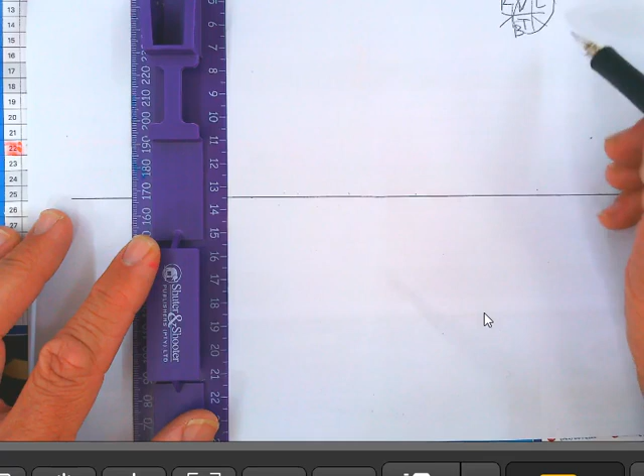So we're going to be having on our page two lines like this. Because it's a left view, we're going to have front, left, and the top view there with a 45-degree line. OK, ek gaan julle gou wys hoe ons daai gaan doen.

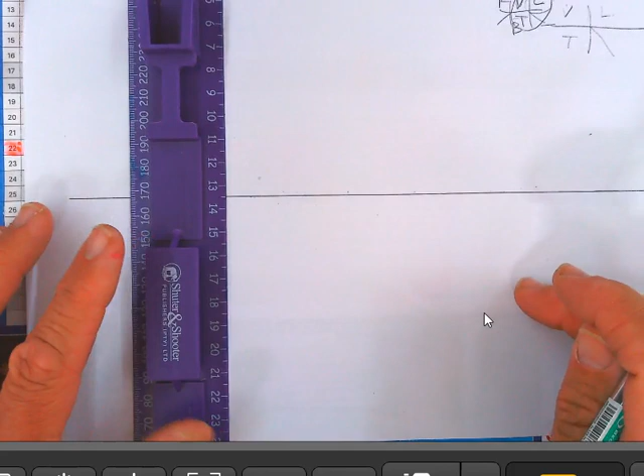Nou, belangrik, I want you to take the triangle that you have and to put it on a ruler. If you don't have this, you can borrow from a friend once they have done this. Put the triangle on the ruler so that it can slide like this, and make sure that it's exactly on your line.

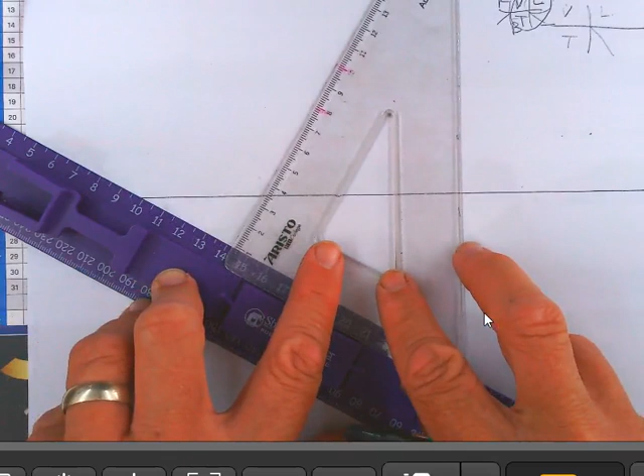Maak seker hy's op die lyn daar, nê. Nou swaai jy net jou driehoek soos dit, you just swivel it, and I'm going to move it this way. You guys have a smaller triangle so you can move it higher up if you want to, or more to the side, that's okay. I'm going to draw a vertical line here.

And if you don't have this but you have a protractor, 'n protractor is 'n gradeboog. Nee, hier's nog een driehoekie wat ek vir iemand kan leen. Daar's hy. Goed, so you can measure this out as a 90-degree corner as well.

If you have got a compass, a passertjie, you can do the following. I'm going to show you quickly how to get the half of this thing. If you don't have a compass, you can use a protractor, I'll show that as well.

You can make a little mark there, and just make sure that the compass doesn't move. As daai beentjies los is, gaan dit nie werk nie, dan moet jy hom vasdraai.

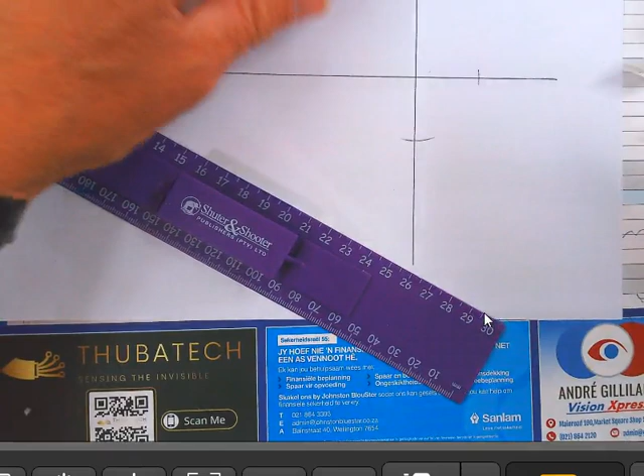Then what you can do, I'm just going to move this up for clarity, then you can put your compass on the same distance and you can just put it on that corner. Draw an arc, trek 'n boogie, sit hom op daai merkie, trek weer 'n boogie, en as jy dit gedoen het, nou het jy daai hoek verdeel in die helfte. En wat is die helfte van 90?

45. So that will give us a 45-degree angle. Listen, this must always be 45.

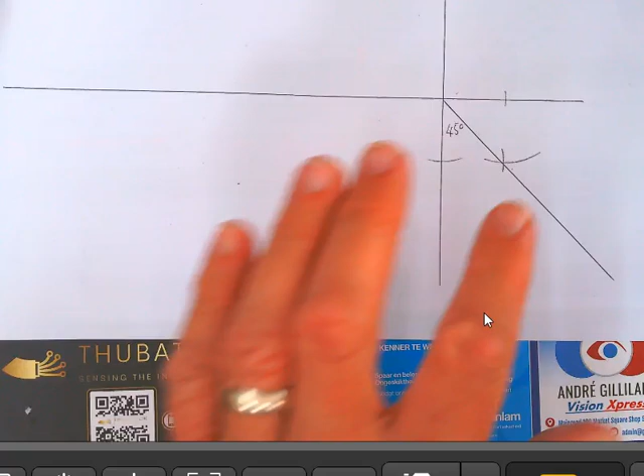So your 45 degree triangle, you will also see this is this triangle. So if you guys are on this vertical line, you should also see this is exactly 45 degrees. Okay, so you can use this triangle as well.

The other way that you can do it is measure the same distance to the side, measure the same distance down. The bigger you make it, the more accurate it's going to be. You can, for instance, measure 10, 20, 30, 40 millimeters or 4 centimeters, just an example.

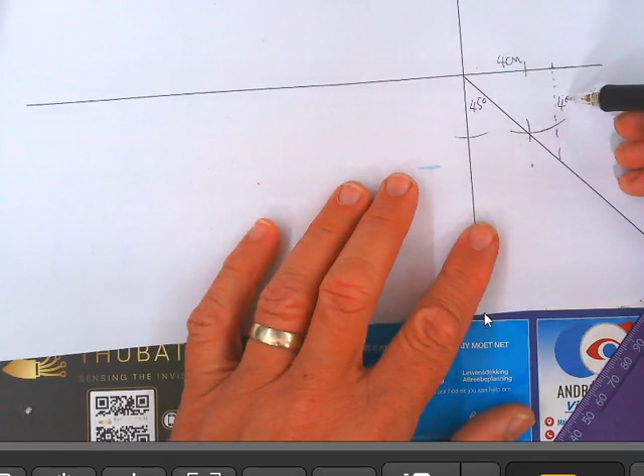And then I can measure straight down 1, 2, 3, and 4 centimeters down, so like half of a square. So 4 centimeters to the side, 4 to the side, 4 down. You can make it 6 to the side, 6 down, and that will give you the 45 degree angle.

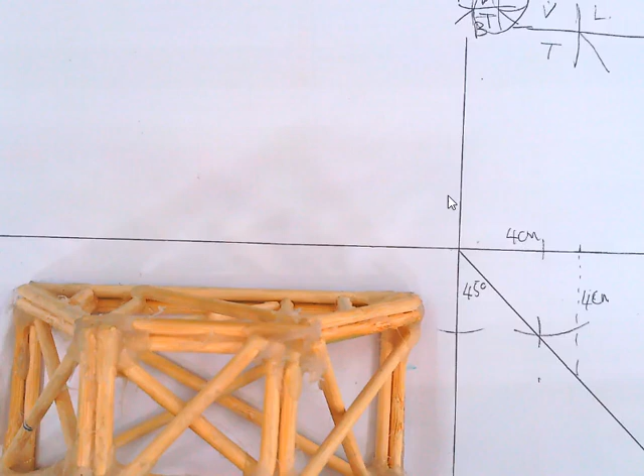So what are we going to do now? I'm going to show you quickly what we're going to be doing. So now we're going to be drawing the front view of the bridge, and the top view of the bridge. I'm going to make this bigger for you. The top view of the bridge. Okay, we can keep a centimeter there.

Can you guys remember what we spoke about the last time? If you leave a space open here, what's going to happen there? You're going to have the same space. Why? Can you guys remember this whole story?

You don't have to fold it. I'm just going to show you, because sometimes you guys forget very quickly.

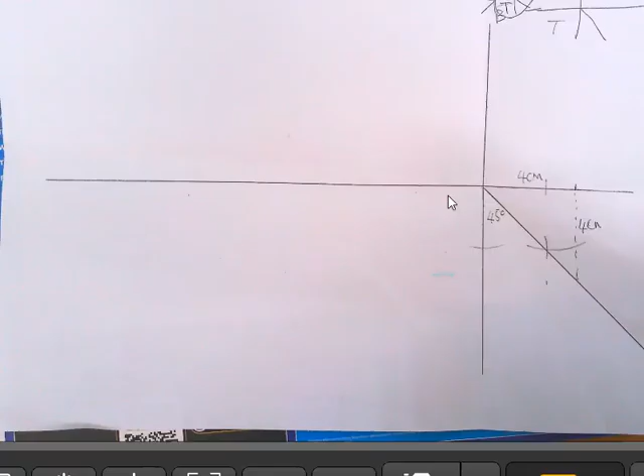What are these measurements? My bridge, the specifications you will receive later, but my bridge is going to be 120 millimeters long. What is 120? It is 12 centimeters. My bridge will be in total, it's supposed to be 50 wide.

So this one is 50 at the top. This one was a little bit more at the bottom, 70. It should fit in 50 by 50. The height in this case was out.

The height was supposed to be 50 as well. I think this thing is more like 70, 60. Okay, so this is not according to specifications.

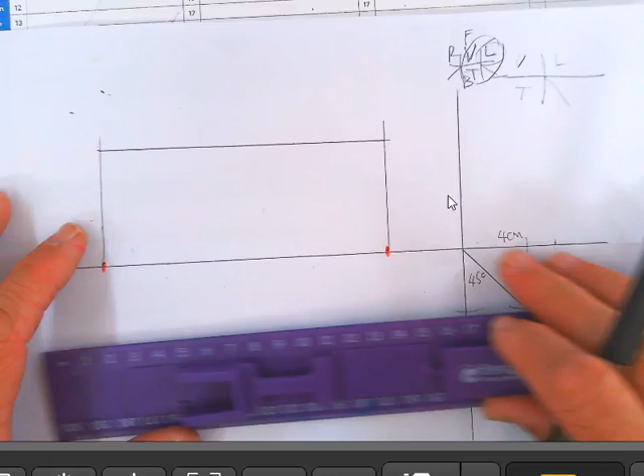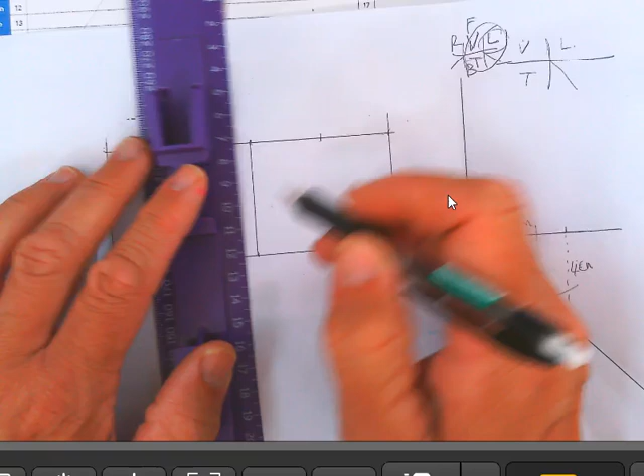Okay, and now I want you to quickly divide this up into 3 centimeter blocks - 3, 6, 9, 12. Do the same on the top: 3, 6, 9 and 12. Alright, and then quickly draw that little box for me.

Light lines, faint lines, not too dark. Draw that quickly for me, and once you've done that, draw the same box on the bottom, so you're going to project downward, bring that line down, bring this line down, bring all these lines down, make sure it's not skew. How do I make sure it's not skew? You can go and put your triangle on that line, and then just move it over - there, and there, and there, that one, and this one.

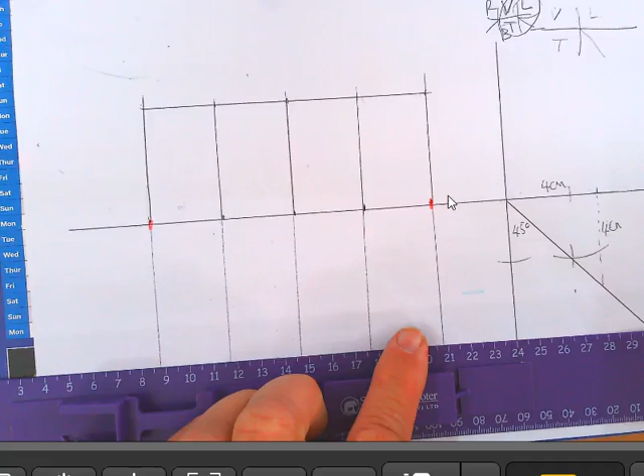I can see one or two of these lines are skewed, like this one. Why? Because I didn't run through that point there. Okay, so this line needs to be raised. Fix it.

Draw this together with me now. And then I want you to leave a centimeter open here. I want you to leave 1 centimeter in the top view. The only reason for that is so your views are not on top of one another, so your views don't lie over each other. So there is my top view.

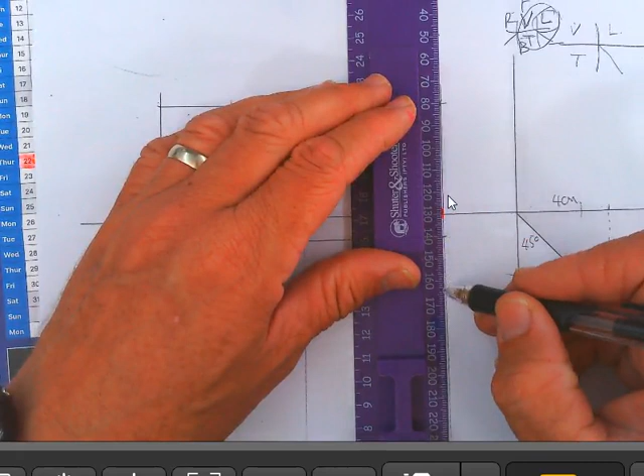There we go, I'm going to make a 5 centimeter gap here: 1, 2, 3, 4 and 5. Why? Because my bridge must be 120 by 50 by 50. 1, 2, 3, 4, 5 centimeters here. I want you to draw another box over here.

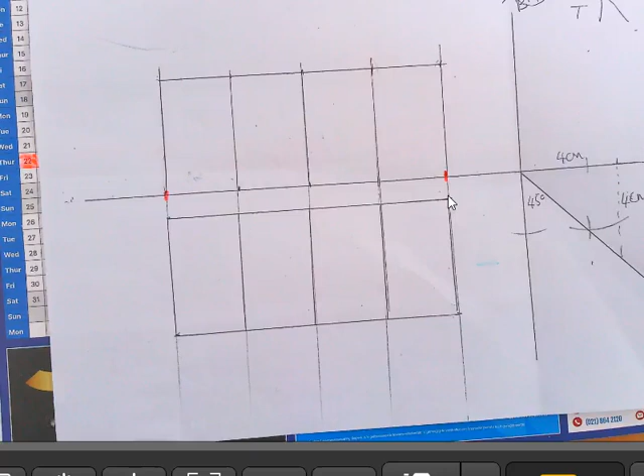Now let's say your idea looked like this. No, now here are terribly many lines, there's a lot of lines here. But let's have a look - we had green lines here in the front, and then we had crosses like that.

So this is my front view. Okay, so what I'm going to do is have a block with crosses there. Let's do that quickly. This is my front view. So you're going to have a line there, you're going to have a line here.

Do you know why this is important? Because these drawings, what are you going to use them for? To build your little bridge, right? You're going to measure off, put your stick down there, mark it off, and then cut it to length. This is why this drawing is so important, okay? And that is why it's called a scale drawing.

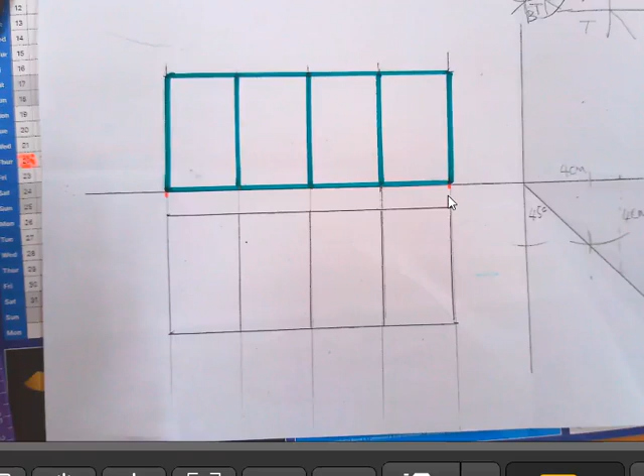So I'm going to draw this in for you there, draw that one in, draw that one in, and then we had those crosses. We had the crosses on there, which were black lines - let me just quickly check where my black pen is. I don't know where that is now, so I'm just going to use a blue pen since I don't have the black one here. So there it goes from corner to corner.

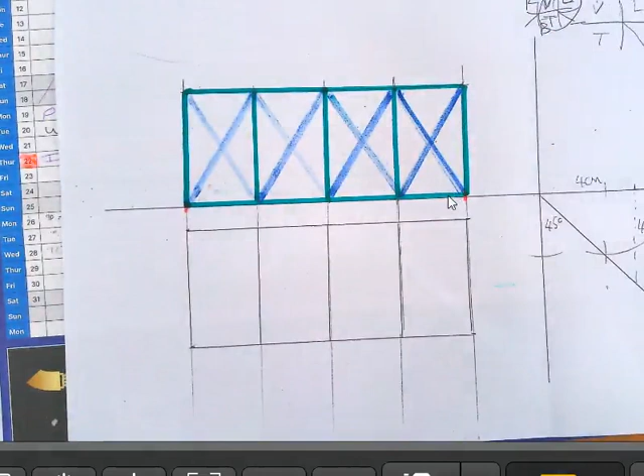Okay, now here's a very important thing to note here, a very important note to take note of, on a practical side. If we are going to zoom in on that corner there, what are we going to see? We're going to see the following.

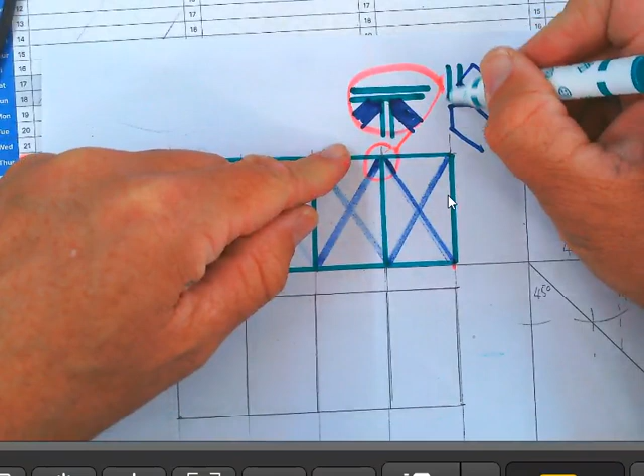Ja, daar gaan gaps wees, want jy gaan nou dit hê en dit hê. Nou is daar 'n gap daar, so dit beteken jy het eintlik nie 'n stewige joint daar nie. Hoor julle wat ek sê? So daar gaan jy baie mooi moet werk.

En dis hoekom ons hierdie ding, so wat sou my raad wees? My raad sou wees, maak jou frame, knip jou stokkies, daai en daai, knip dan jou ander stokkies wat tussenin lê. Nou onthou julle ek het gesê, die goed gaan op mekaar rus. So jy sny daai, kry een nou in die groep wat 4 stokkies vir jou klaar sny, hy doen daai op sy eie. Dan weet jy, hulle is dieselfde lengte. Dan kry jy 'n ander chommy wat hierdie stukke tussenin doen. En hulle moet presies almal dieselfde lengte wees, nê?

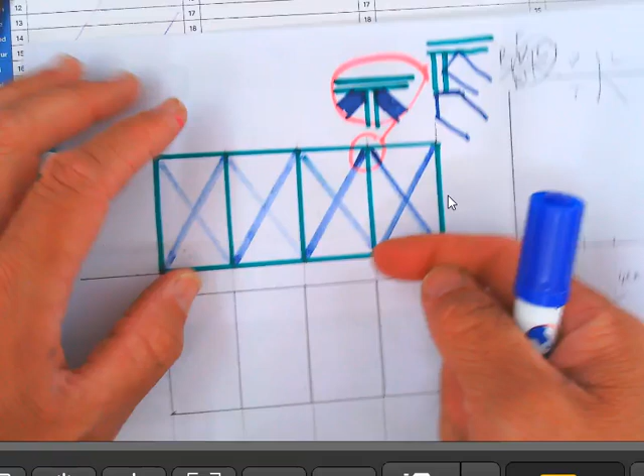OK, as ek dan dit klaar gedoen het, dan vat ek my ander stokkies tussenin en ek meet hom af, ek knip hom met my side cutter dat ek daai lekker hoekie het soos wat hy daar lyk en dan meet ek hom af en dan sny ek hom op sy lengte, nê? So dit gaan vir julle die beste werk om seker te maak dat jy 'n baie akkurate bruggie het, nê? En dat hy baie sterk is.

Dan moenie gaps wees tussen daai hoekie en daar nie, onnodige gaps nie, nê? Jy kan nie 'n ding glue wat hier stop en nou sit jy baie gom daar nie, want hy gaan flex. Hy gaan beweeg en dan gaan jou brug kollaps.

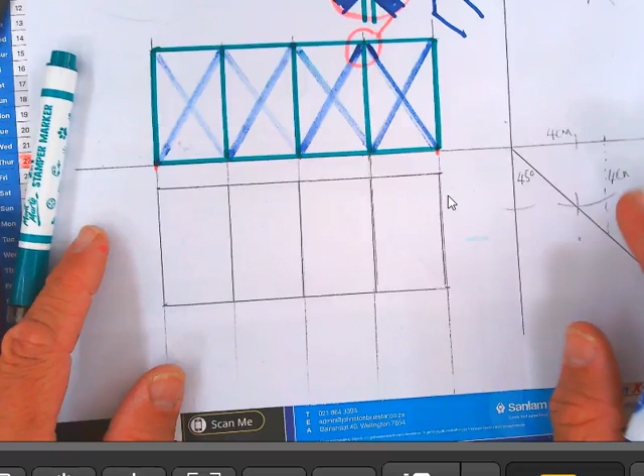OK. So teken gou vir my die vooraansig soos jy hom design het, gaan doen vir my jou bo-aansig, jou top view. Now in my case my top view looked the same, it had pink triangles there, so ek sal dit gou insit.

So this is my top view. And this is for the grade 9 technology PAT 2026, to make sure

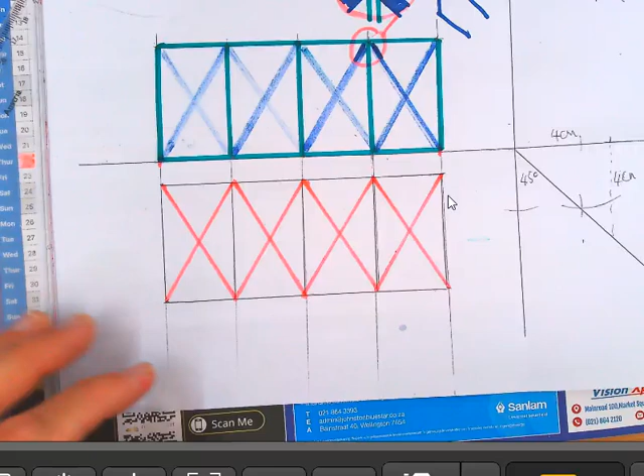that you know how to do this. Hierdie gaan ook groen wees. This will also be green in color because I'm having the top part of this bridge. Okay? Your design doesn't have to look like mine. I'm just showing this as an example.

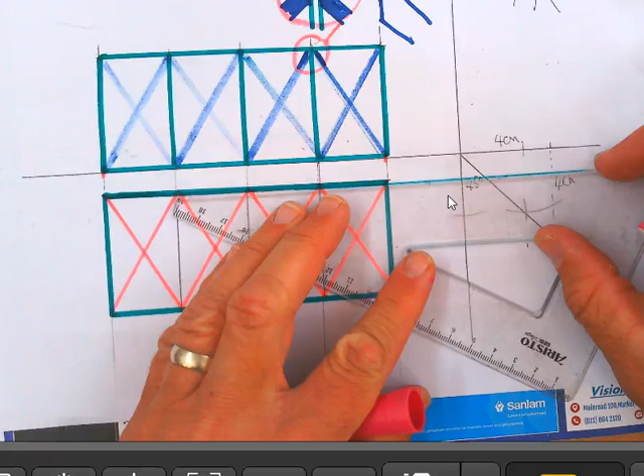Okay? Your design could be different. Nou hier kom die belangrikste deel van die tekening, nê? I would say the most important part. Why? Because you are now going to project over to your left view. So I'm going to take my ruler and I'm going to draw a line straight across to that point there. I'm going to draw a line straight across to this point here. I want you to do this with me.

And now I'm going to go straight up, 90 degrees up. How do I do that? I take my ruler, put it down, put my triangle on top of it. Okay?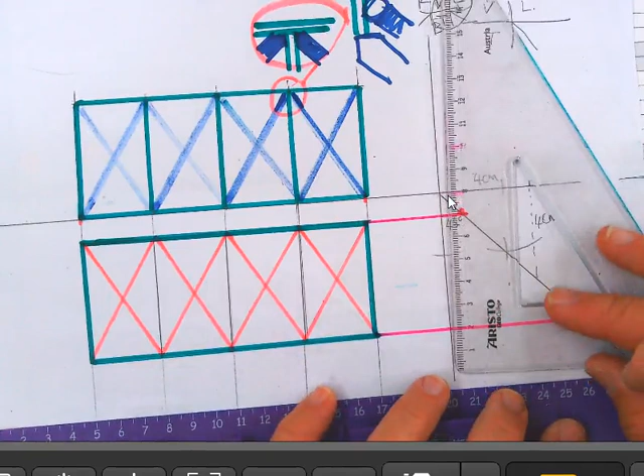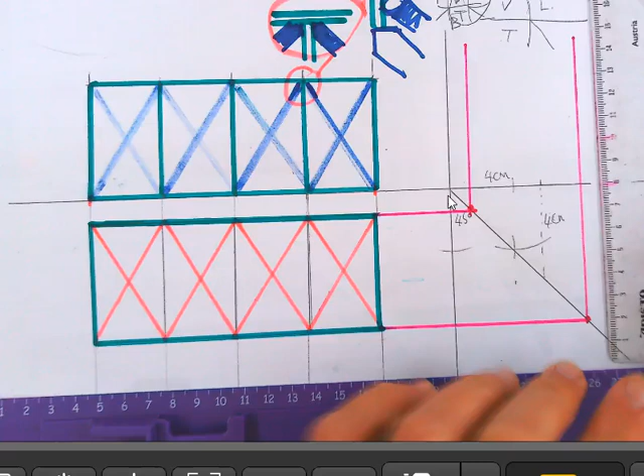And if you've got a smaller triangle, that's okay. Then just move it up a little bit. And make sure it's 90 degrees. Take this line up, construction line. Use your triangle and your ruler together to ensure accuracy. Right, project this line up. Once you've got this, you're going to project over from this side.

Okay, this will give you the outline of your left view. So this should be 50, rather, 50 by 50. Exactly like we spoke about the previous time. If you fold this, see what you get. Have a look there. You can see that it is correct. This is what you're going to get.

The left view of your bridge. Okay, so now let's quickly talk about this part. Now you have to think about this design. That's why we did the sketch like this before. So what I'm going to do is I'm going to adapt quickly. What I'm going to do is I'm going to try something new.

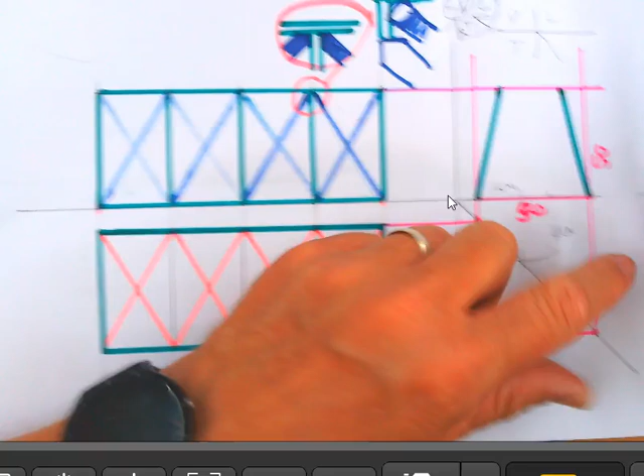I'm going to put in a strengthening part over here. 1 centimeter in, 1 centimeter from this side. I'm going to draw it into the corner there. Okay, and then I will also go and put, just for myself, I'm going to put a centimeter down. I'm going to put a line or a skewer stick over like that. I'm going to put 1 centimeter down there. I'm going to put a skewer stick over like that.

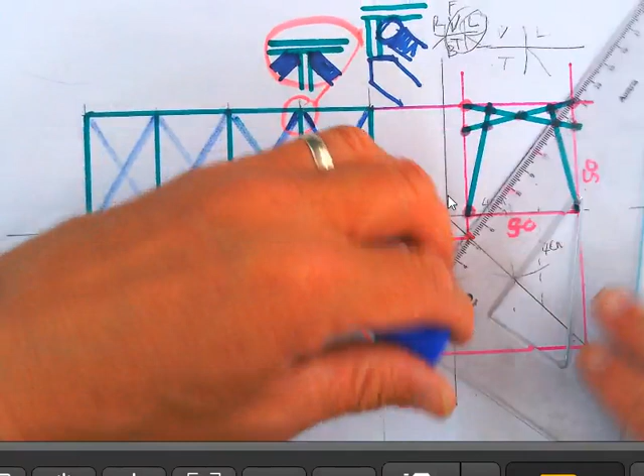Where will I glue it? Let me show you where I will glue it. I will glue it there, there, there, on that point, in the center, on those 2 points, there and there. I will put it on the inside there. This should give you quite a strong design. You still have a lot of open space. You can even go further if you want to and add another part in here. You don't have to, but you could.

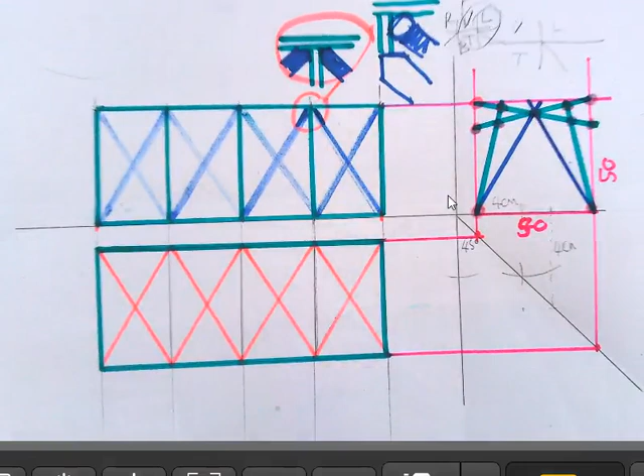Even to the top there if you wanted to. Do you have to do it this way? No, you don't have to. This is just my design.

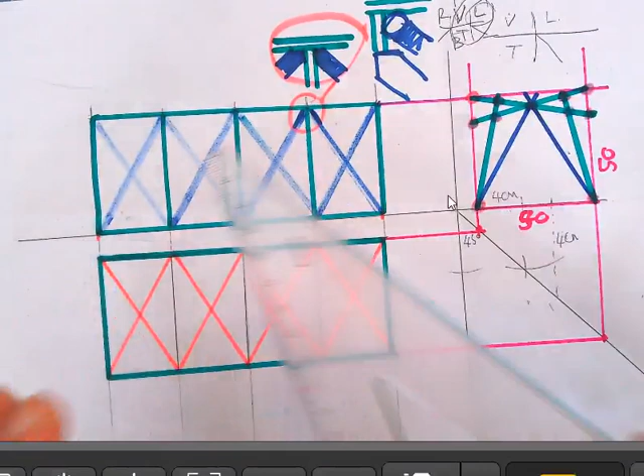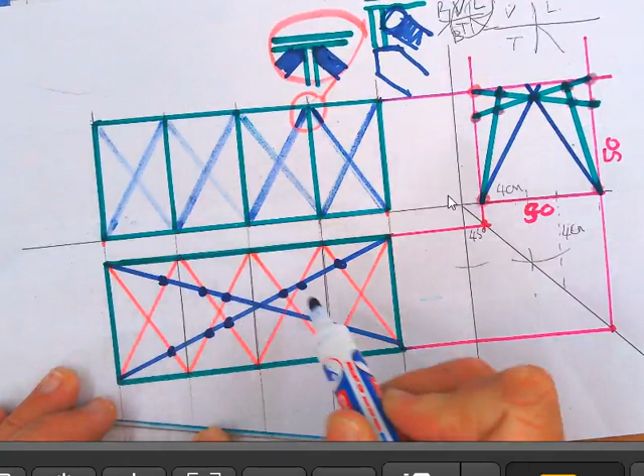You can put this shape on every one of these little brackets, every one of these little squares. In the end, to make sure this thing is really strong, I would put one long skewer stick from this side to that side on the top and bottom, and join it over like this. I would glue it in all of those places with a glue gun, just a little bit of glue there, and that will ensure that your structure will be extra strong.

So there you have your front view, there you have your top view, here you have your left view, and now you have enough to work with so that you can actually start and make your thing.

So what's going to be the process for you guys? You're going to make this drawing and put it into your book.

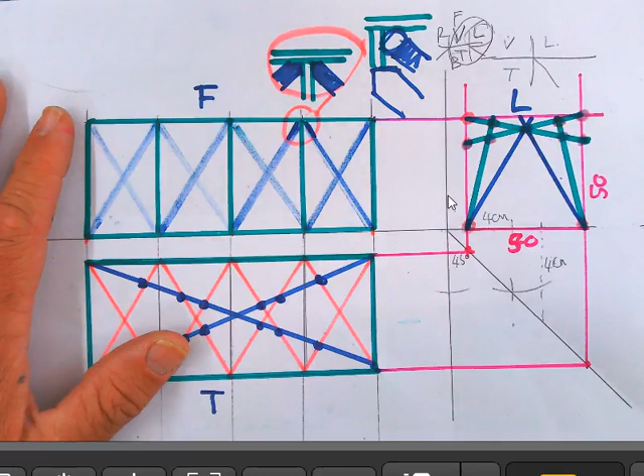Next time I'm going to hand out the packs to you guys. You will sit together with your friends that you've selected, not more than 7, but not less than 4 people in a group. It can be 6 or 7 people in a group.

So 4 minimum, 7 maximum. If it's not within that range, please come and talk to me first. I don't want solo projects. You're not going to come and hand in one bridge and one pack and say, this is my assignment.

Remember, you're going to get 35 marks for your own pack, in other words, your own scale drawing, your own designs. That is 50% of your term mark. The other 50% is the collaborative bridge you're going to be building with your friends.

You can still adapt, right? So you can look at this design and say, we love this design, but we're going to make a box instead of it being tapered towards the inside. So you can still change the final design, but in the end, you guys will have to be able to build a rigid bridge, which we will test.

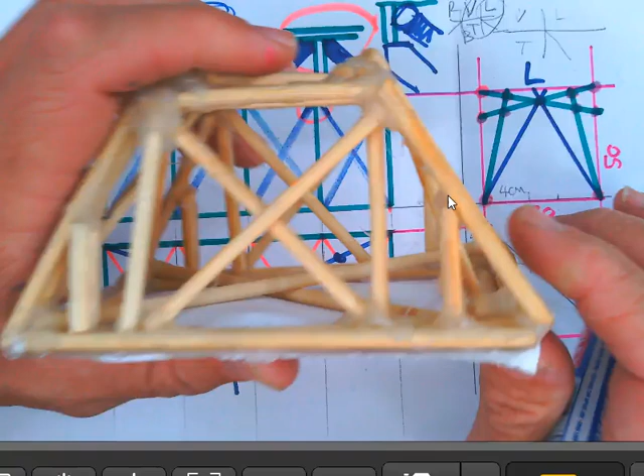This will be assessed in two ways. I will look at the overall design, and I will look at the strength, in other words, do you have triangulation where it should be, and the appearance of the bridge. So 2 marks, those 2 marks out of 10 each will be converted to a mark out of 35. The 35 plus the 35 which you personally got for your pack will make up your final mark for your assignment.

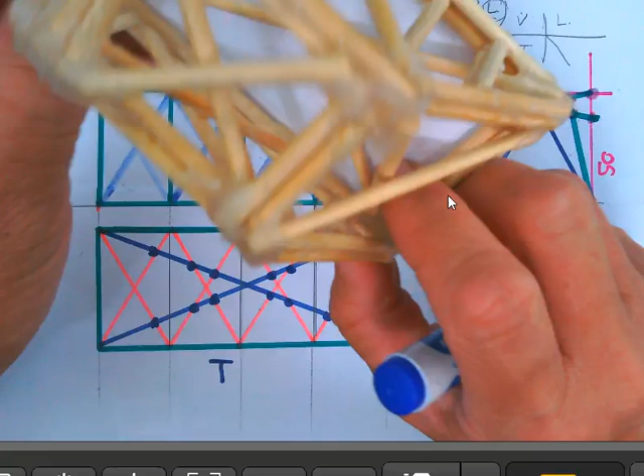You can decide yourself who you want to go with, but please don't exclude people. Don't be exclusive, that's what the word exclusive means, you exclude people. We don't want to exclude anyone, but I give you guys a chance to select your group yourself. If there are problems and it doesn't work, then I will have to add people to some of the groups.

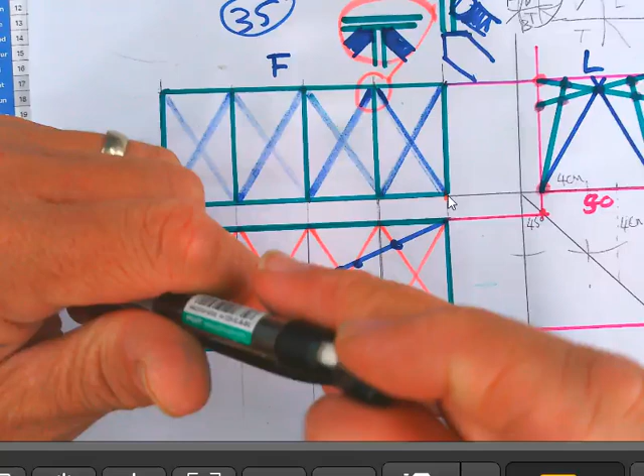I believe you guys are big enough to make the right choices there. It's your responsibility to make sure that one person in the group must take leadership and say, listen, you're going to make this part, I'm going to make this part, you're going to bring the skewer sticks, we're all going to add 5 rand to buy a pack of skewer sticks.